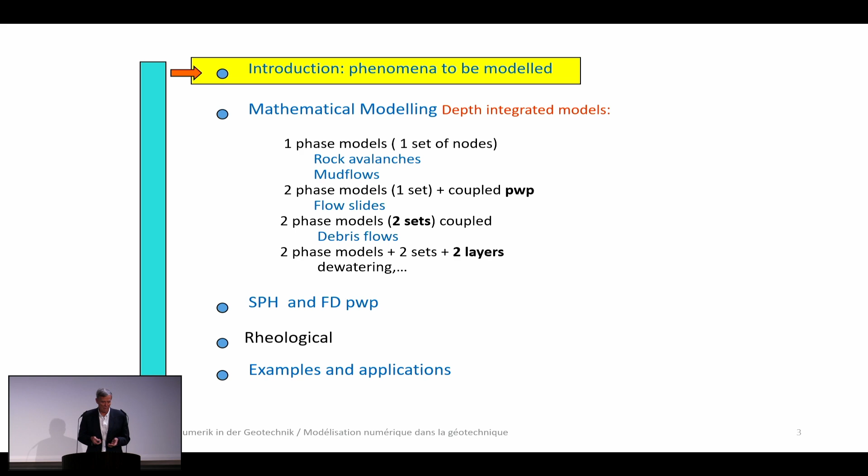Also, I'm working on a project for a bank, and people are interested in knowing, if I invest that money, will that help save money? So we are dealing with cost, risk, vulnerability, intensity of events. And also, what happens if I have to do 1,000 simulations? Sometimes it is useful to use artificial intelligence, deep learning, and whatever. So this could help. We could be talking a little bit about that.

So just to start with the phenomena we want to model, those are probably the simplest. Avalanches are just one phase. And in fact, it is the problem that people started to model at the beginning. For instance, Hutter started modeling these sorts of things using finite elements or finite differences for propagation of landslides. I have to say that what we are doing is not new. If you go back to glaciers, people were doing these things long before we were.

Then we have also mud flows. Even if it is water and soil, a mixture, people are not considering them as two-phase materials. However, in the case,

Perhaps the battery is not. Okay, seems it is dead. No, it is still alive. Okay. So the talk could take more time for sure.

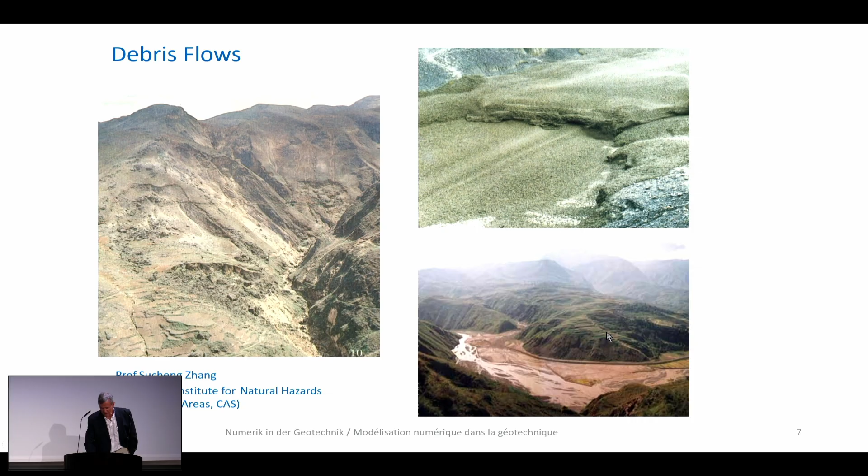So debris flow is a more demanding case, because the recipe for a debris flow is having soil, as you see here, landslides, and water. At the end, these problems finish by causing a lot of damage in regions like, for instance, South China. We have also other more watery debris flows, and in this case I remember reading in the newspapers there were floods, but a flood coming with these stones is a little bit exceptional.

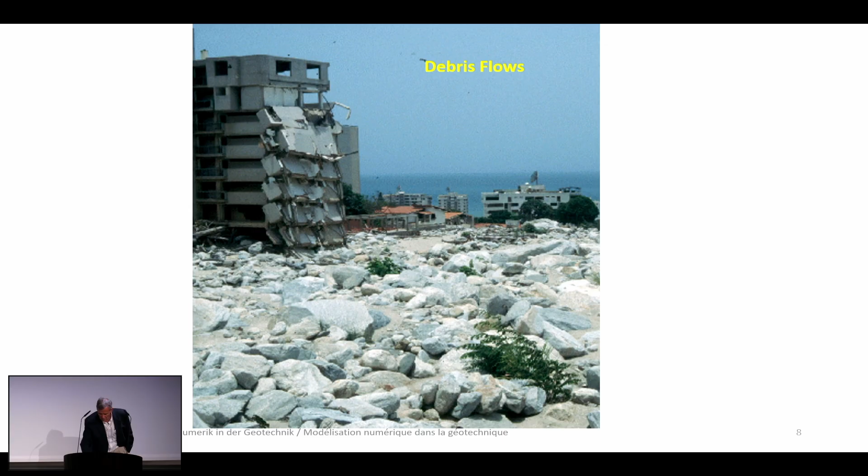Then, okay, let us see if I can use the, oh, far better, I will use the keyboard.

And then also we have the problem, which today is quite important, of landslides into lakes because of climate change, which is something we have to worry about. Permafrost is disappearing. There are blocks of ice in the Andes which are falling down into the reservoirs. And also because of us, people are, for instance, building an electric power plant in China, and then the water level is increasing, and that could trigger avalanches into the reservoir, with consequences that are very bad.

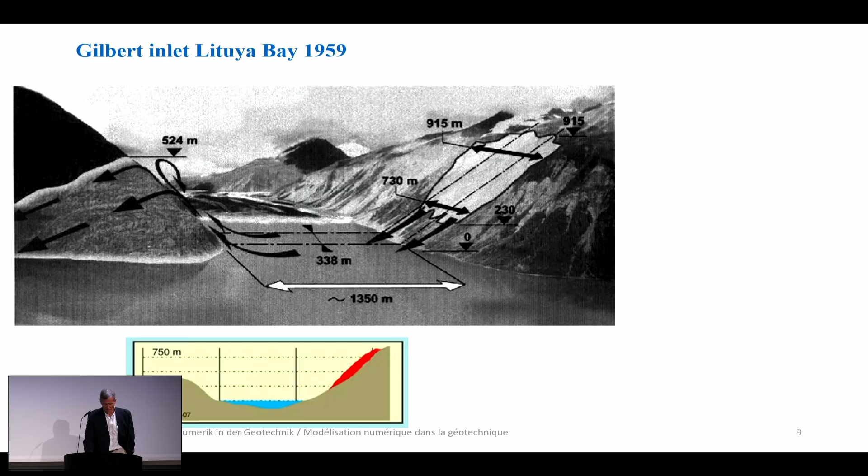So, talking about models, here you have a view, more or less, and it is true that people, as always, started with the simplest cases and moved on to more complicated ones. Even from the beginning, people were using 3D models and depth-integrated models also.

The problem with the 3D that exists today is that it takes a lot of time when propagating a very big avalanche or one with a very big runout. Techniques there are level set, which costs a lot of effort, SPH, and the material point method, which is newer. And here, the depth integrated approaches, either Eulerian or Lagrangian, have been used progressively from avalanches to flow slides to waves in reservoirs and to debris flow using two phases.

Many questions. Which is the model we have to use? Well, it depends on what you want to do. If the problem is simple, use a simple model. If not, second, depth integrated, what are they? And we will see it. Depth integrated models are cheaper, are faster, but they have to be used together with other models if you have a singular point. It is like when in a beam you have a stress concentration, you go to finite elements, to crack dynamics or whatever. And here is the same.

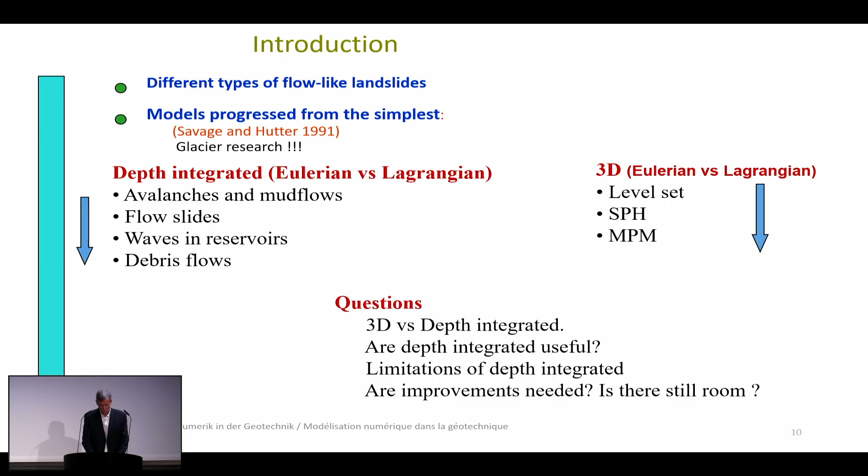Sometimes you are moving the avalanche, and at a certain moment you change from depth integrated to 3D, solve the problem in 3D and continue with the depth integrated. So combination of techniques is quite important. We will talk about this also a little bit. Well, so, this is good.

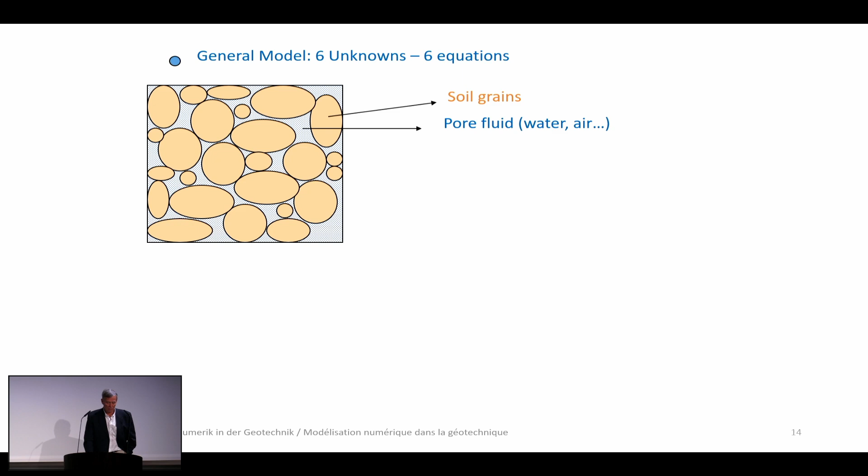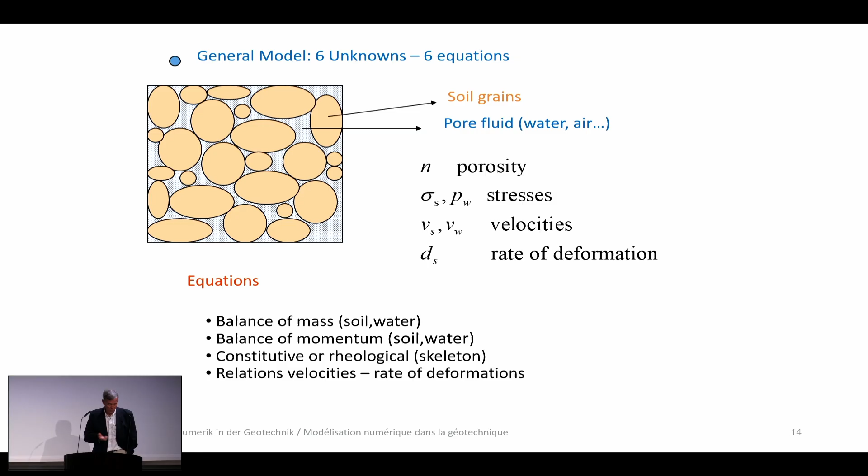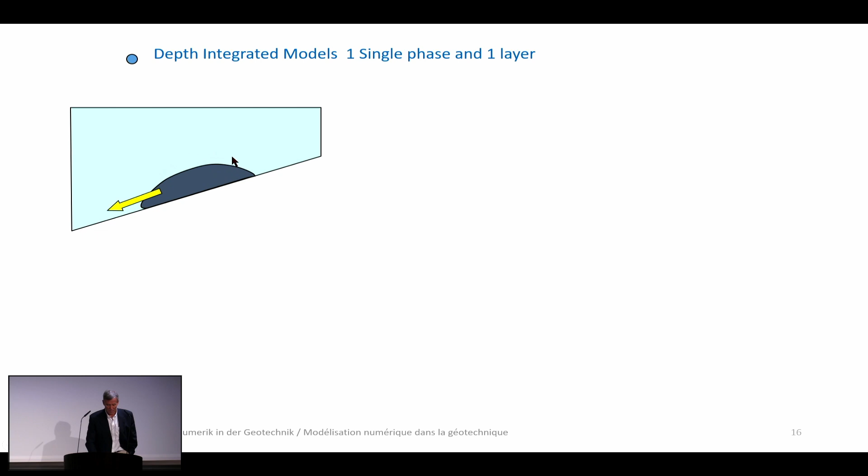Mathematical modeling, there are some questions, some concepts that are quite important. First of all, the three-dimensional model, even when the soil is saturated, which is simpler than when it is unsaturated, requires a lot of variables and a lot of equations, which is what makes them very, very expensive. The good news is that we can move using these general equations into much simpler models. What is the problem we find sometimes? Where is this free surface? Also, the boundary condition on the bottom. And these, even in the simplest cases, are the unknowns that we have.

On the other hand, if we are using depth integrated, what we are using is the height, this variable h that we have here, and the elevation. So the problem becomes a two-dimensional problem, and we don't have to care about where the free surface is, because we have it defined with this variable. Unknowns are fewer, and life is cheaper. But remember, if you have a problem which is difficult, you have to get back to the 3D problems.

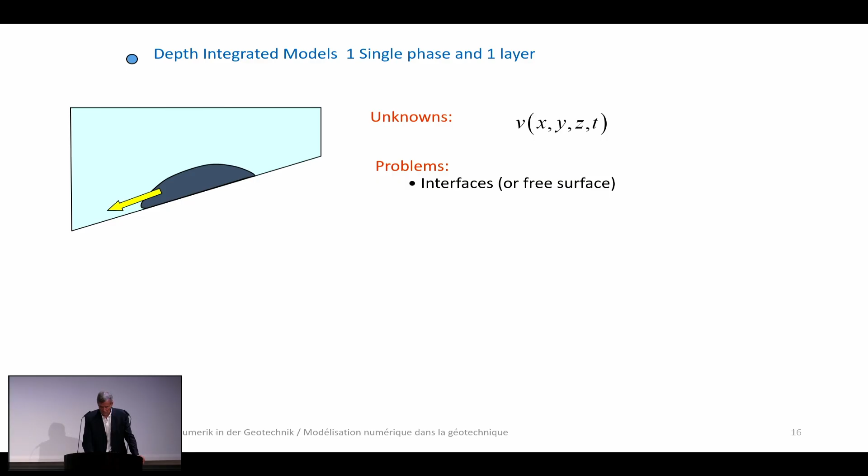Good. And what are the equations? As I'm in a department of mathematics, if I don't show an equation, I will be banned or whatever when coming back to Madrid. But anyway, life is not that difficult.

If you look here, this is an avalanche which is moving, and let us consider just one column. Force equals mass times acceleration. Which are the forces? The forces that we have here: the pressure at the sides, gravity, basal friction. And then what is the mass? The mass of this column, and the acceleration. That means that if we know these forces and the gradients, we are able to predict how this column of soil is accelerating. And this is the key of these depth integrated models.

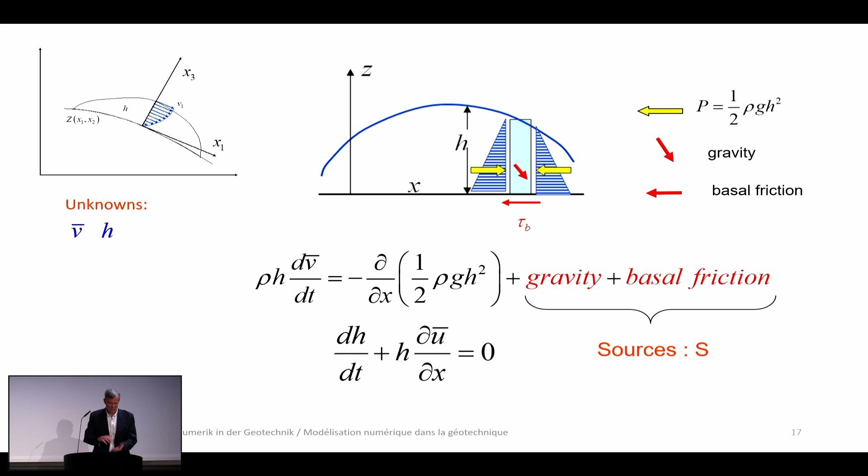Then what we write is an equation like that. So this is the gradient of the pressure. But if you look at it, even if it looks a little bit awful, what we have is mass times acceleration equals forces, period. Now the problem is how to move this equation into our nodes, into the points, because we are going to use points. And of course, we need the mass conservation, which is that what is entering causes the soil surface to move up or not.

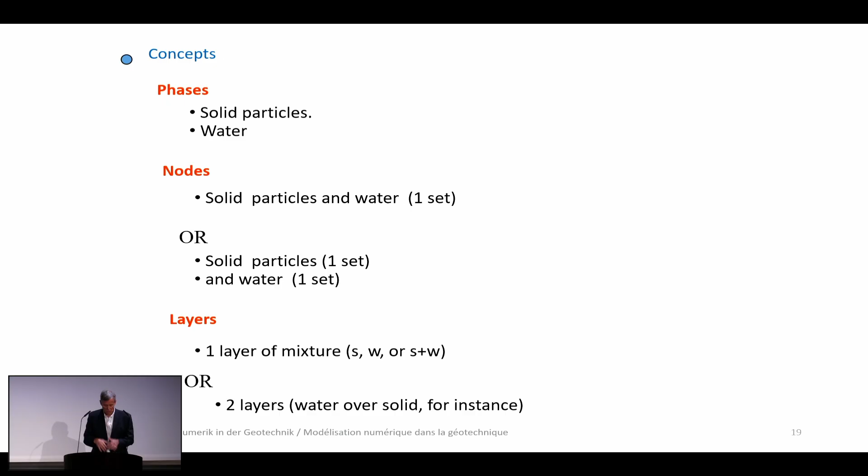Now, there is a lot of hocus pocus these days in these models, and there are some concepts which are important. Phases: the old concept that we are always using, solid and water. Then nodes. We can use one set of nodes for the mixture, or one set of nodes for the solid and another for the water, and we have to do that when the water is moving relative to the soil, which is important. Layers. If everything is homogeneous, we consider just one layer. But in some cases, we will need to use two. So I'm going to pass very fast over these concepts and illustrate how we use them in modeling.

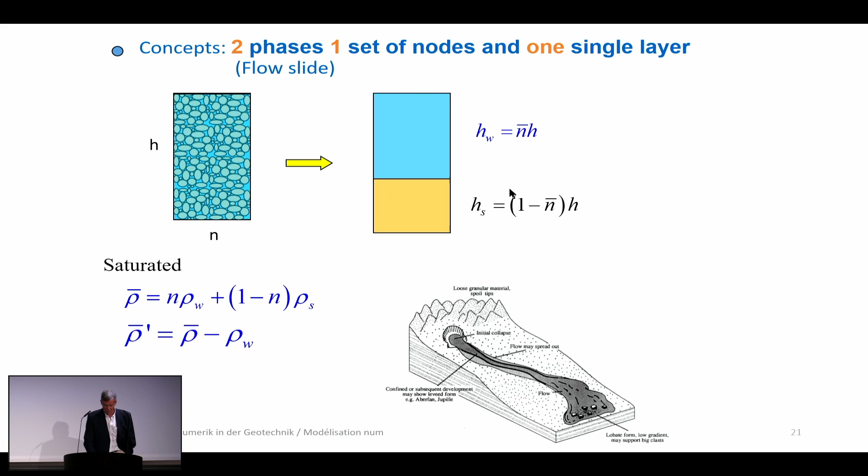So avalanches and mud flows, one phase. We don't have to worry. Either we have unsaturated dry, where air is a fluid but is not considered so far, or mud flows. Okay, one phase. Next could be having two phases, water and soil, interacting through water pressures, but one set of nodes. It is like what, for instance, finite element codes do, considering nodes with variables for water pressure and displacement, so u-p formulations. This is a nice approach. Then the pore water pressure that we have to use.

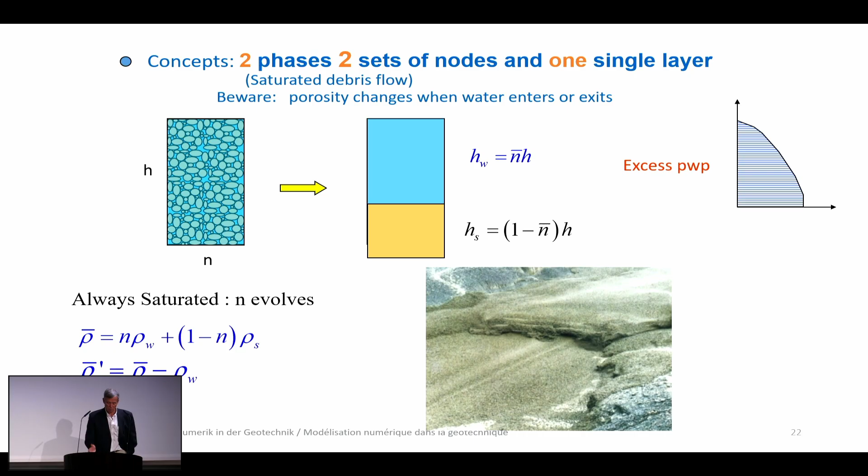In the case of the debris flow, the situation changes because we have two phases, and now we will need two sets of nodes. Again, if everything is homogeneous, it is just one single layer. Again, we may use, if we need it, pore water pressure analysis. And in the case of waves generated by a landslide, what is important is that we have a column here, but in this column we have just soil and water. The air is something that we are not considering so far. Okay.

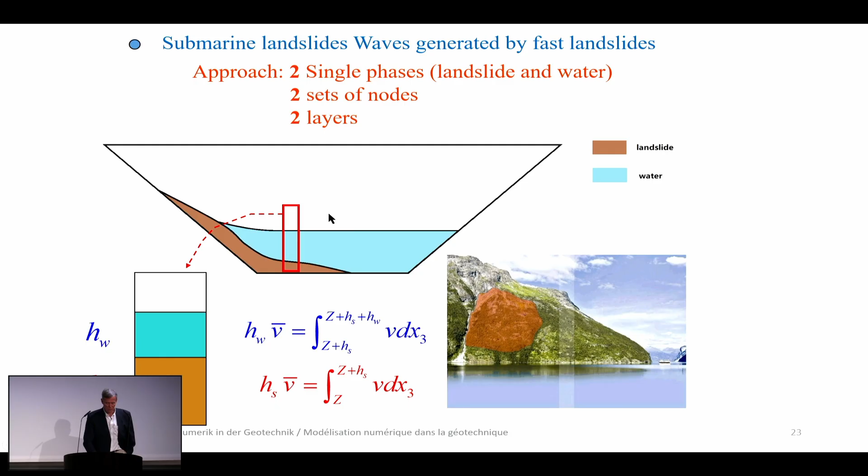But this is the simplest approach. This is what we are doing now. But there are problems. So I will just talk about this one, the dewatering. So imagine that you have a debris flow, and the water is abandoning the debris flow. So what will happen is that the water level will be moving down.

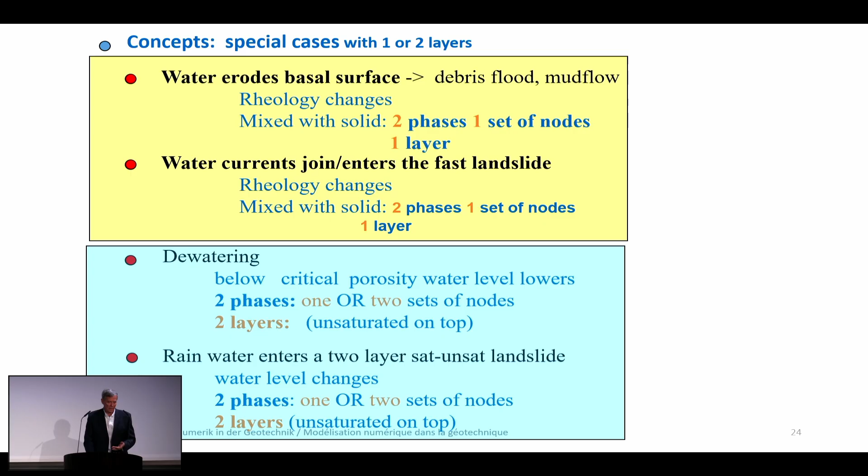So we will have something which is not homogeneous. So we will have a two-layer system. And it is important. In other cases, we are adding water to the mix and whatever. So this is just to show you the three cases where we have this problem of the dewatering. The first case is that the solid fraction can stop before the water does, and then the water is abandoning the fluid, the mass.

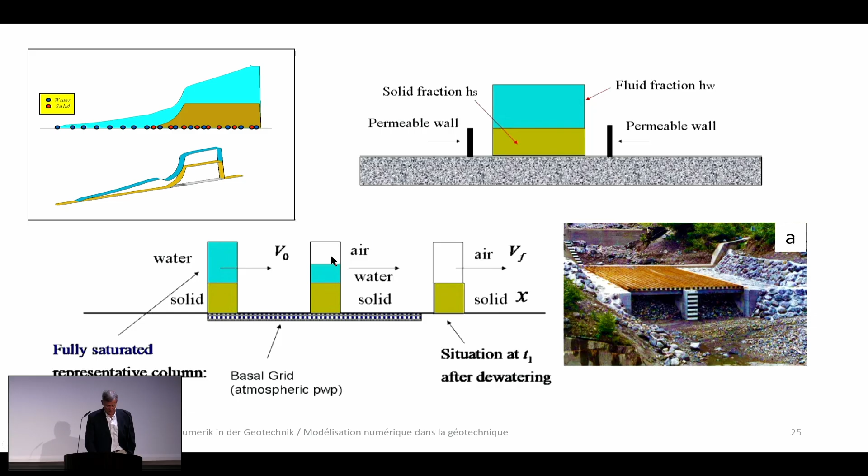The second is something that for engineers is important, because we can use permeable walls. This sort of, not to do propaganda, grids that are just retaining big particles but letting the water pass through. And also the basal grids which are letting the water abandon the soil. So these things are causing the water level to get down. And then we finish by having a desaturated part, a dry part in the column.

The equations, well, here what we have to do is to consider that we have two layers, and then just for the sake of representation, we will use white color for the air fraction, blue for the water fraction, and brown for the solid. It doesn't mean that one is on top and the others continue going down.

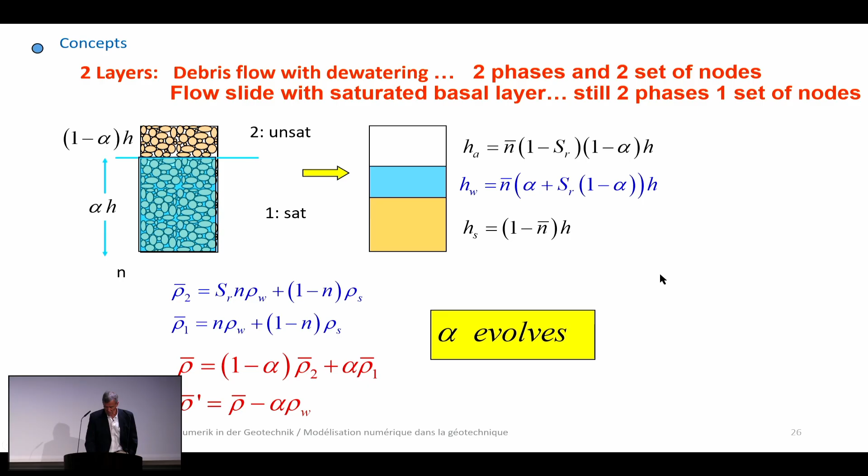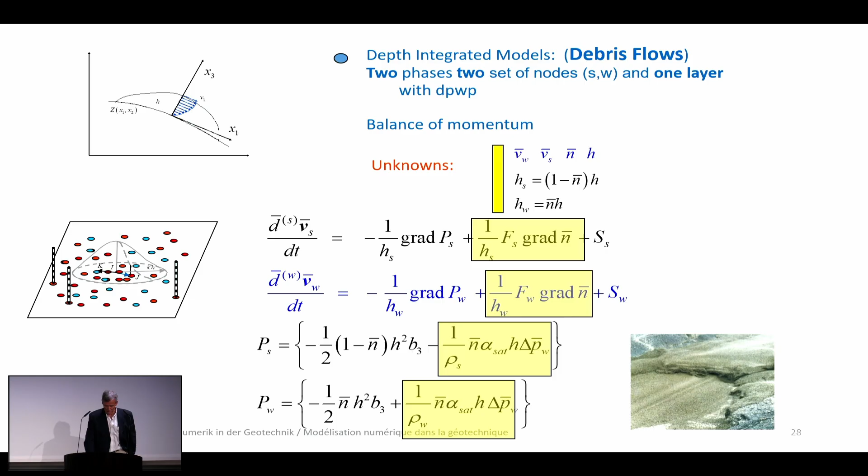These are the equations in their full glory. Never mind, all of them are acceleration and forces divided by mass here. So for solid and water, you can put them in the way you wish. The good thing of these Lagrangian approaches is that they are much more easily understood. And here I have included a little picture about the nodes that are used in this more general case. We have red for the soil, blue for the water, and then we have also these columns, which means that we can model pore water pressure dissipation using an extra finite difference mesh and all these things.

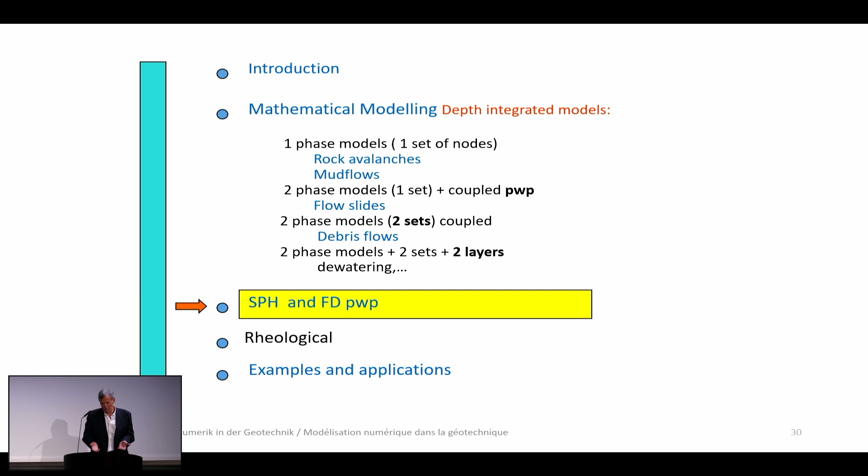Now, force equals mass times acceleration. But forces include gradients. If we would only have direct forces like gravity, everything would be very easy. But we need interaction. And to do this interaction, we have to obtain the gradients, like in finite elements. We obtain the B matrix and all these things. Here it is a little bit more complicated.

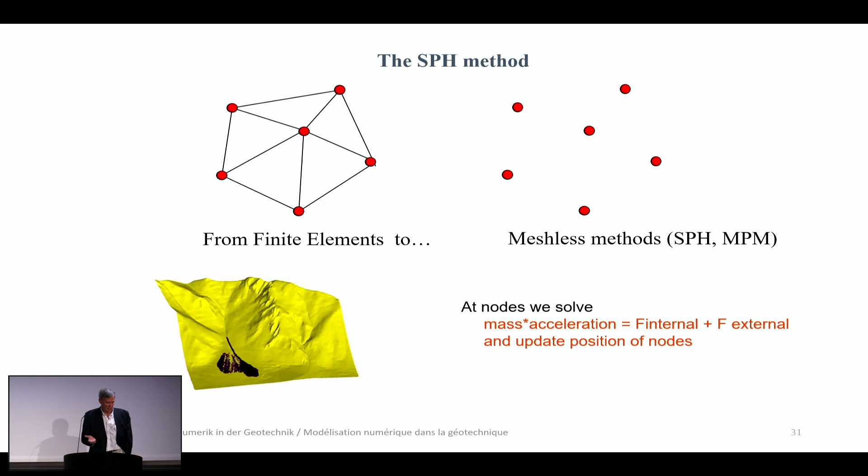And this is the moment at which people get a little bit confused. So just to begin, SPH is a meshless method. Think of a finite element mesh without the elements. The nodes remain. Advantages: you can have the nodes moving around. For instance, this is one of the first cases that we studied in Italy, in Campania.

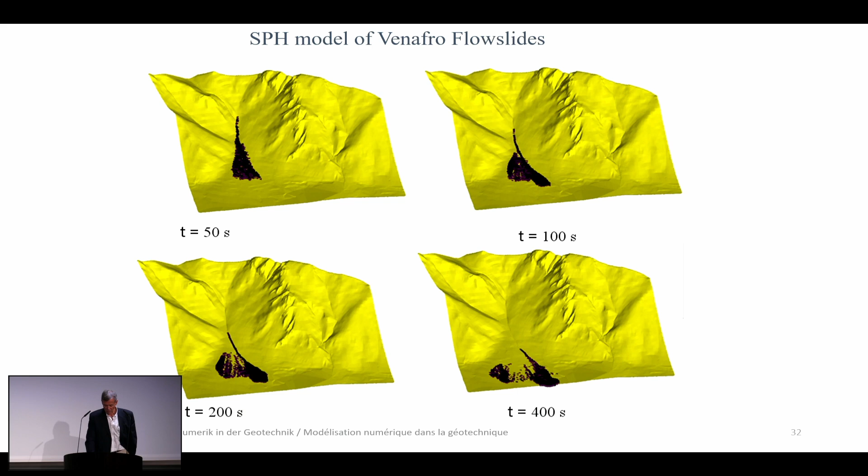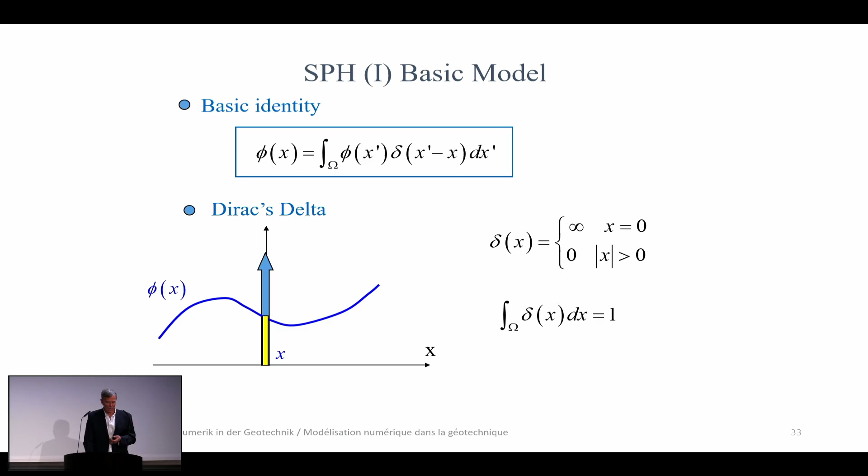So instead of using the delta, we use this sort of umbrella, very useful today, this sort of umbrella functions, which take into account, for this point, only the points which are under the umbrella. So under certain conditions, this approximation is correct when this function approximates the Dirac delta. So still, this is an integral approximation. Wow, this is very difficult. And then, okay, I will stick to finite elements.

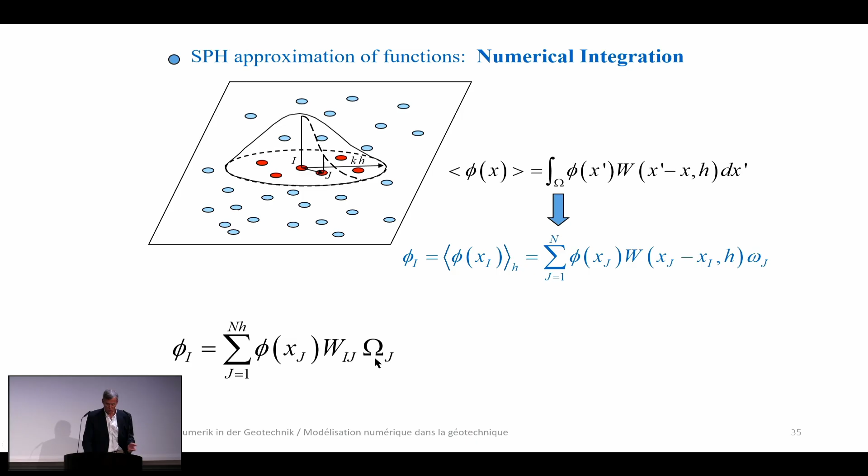Good. Now, if you look at this thing, the problem is that we are interested in what is happening in the nodes. What to do? Okay, what we do in finite elements: we do a numerical integration. So this integral, we say it is a summation of the values at all the points multiplied by the weight, the associated area. So again, from here, things could be much simpler. And then the function is given by an expression like that, where this is the associated volume, and here we are. Still, why do we need to define a function if we know the function?

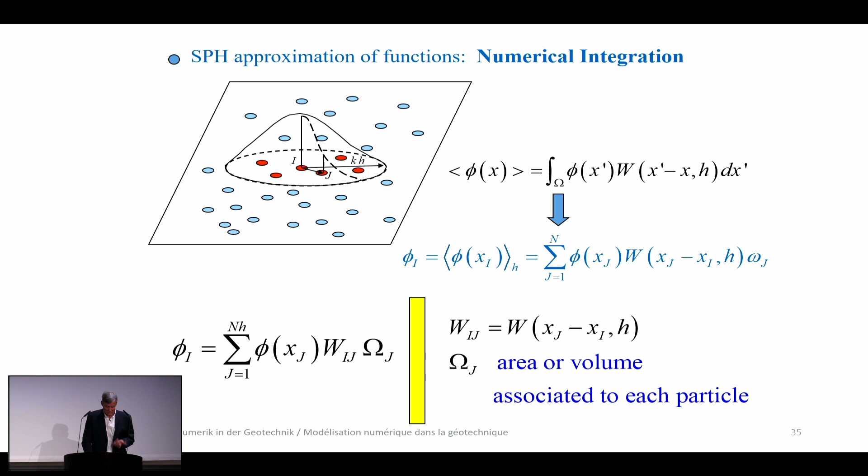Answer, because what we really need is to approximate the derivatives. So this is for the case of SPH. For all of you who are familiar with SPH, in SPH, mass is introduced as density times the volume, and then you play with densities, with masses, or whatever.

Here, we are talking about volumes, so we are not talking about a mass, we are talking about this volume. This is the associated surface for this particular point, and this is the height. So the interesting thing is that the mass is a volume, and the density is precisely this height. If you have, for instance, an SPH code for compressible flow, then it is very, very easy to change it into a depth integrated flow, which is what I did. You just change densities by heights, and everything runs smoothly.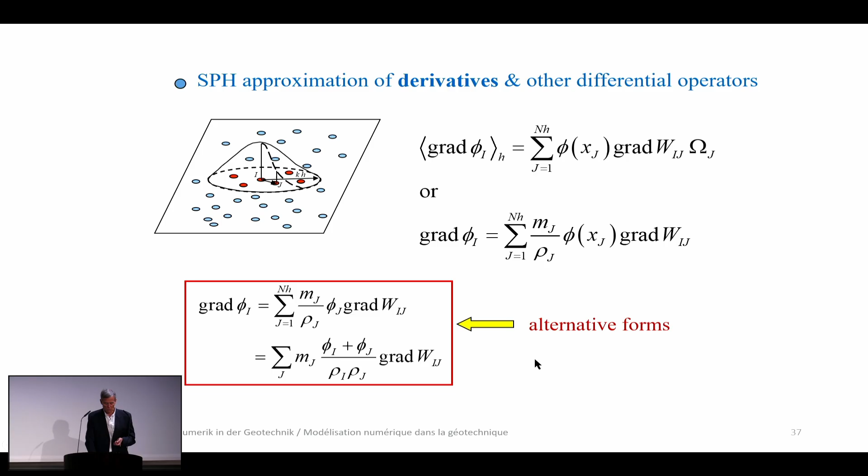Okay, let us continue. The equations, I'm taking out the sources, the forces of gravity and friction. This is the equation that we have for solving the problem due to the pressure. So acceleration at one point is given by this summation. So it is not difficult. Well, I am lying a little bit because you need to know which are your neighbors, okay?

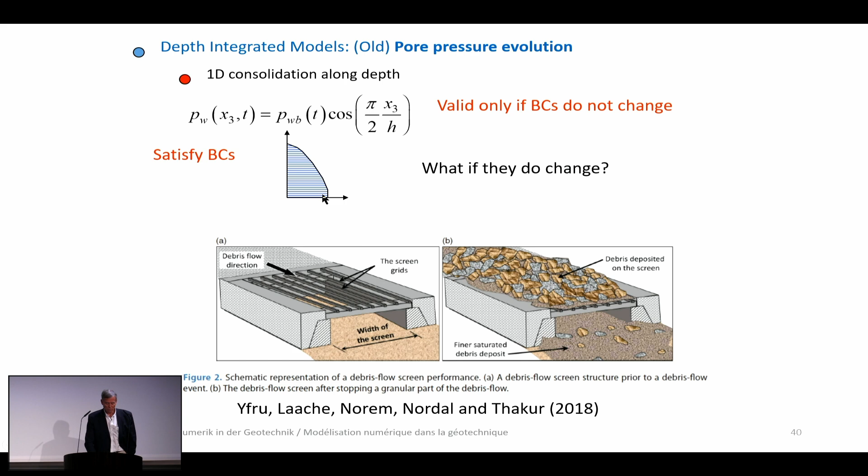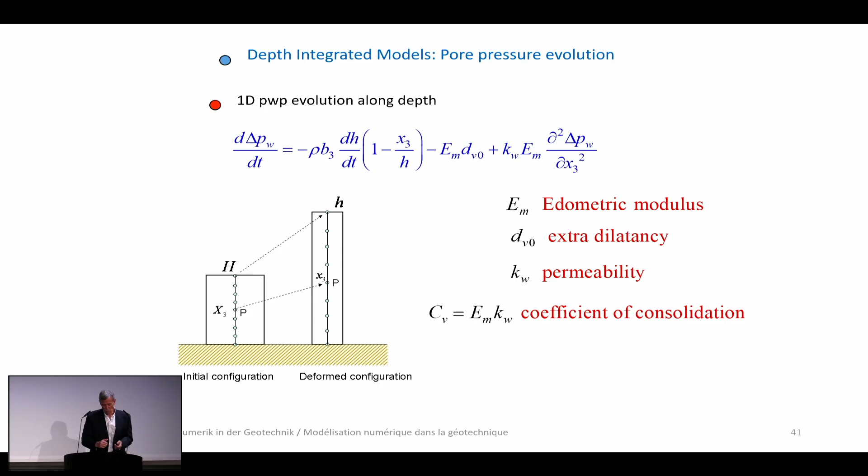What to do? Well, what we can do is to use this sort of finite difference meshes; this is a pure Lagrangian formulation, so it is immediate. So we solve it with finite differences. So you see, SPH, but SPH plus finite differences. And then we can solve this equation, and we can add whatever we have. For instance, we can add extra dilatancy if, like some people say, when a material is shearing, it tries to dilate. So this is the idea.

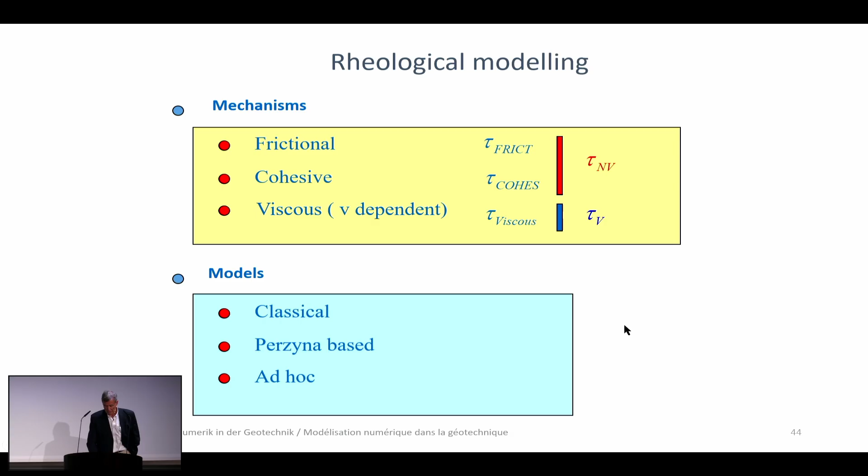Then rheology. The rheology is also very simple. Mechanism of friction: the mechanism of basal friction is friction, of course. Cohesion, and then we also have some viscous effects. Models: most people use classical or ad hoc models, like for instance Voellmy, but they could also be based on Perzyna. However, I will tell you about a problem.

In all the formulations we have, the basal friction is obtained by using the gradient of the velocity. But in depth integrated problems, we have lost this profile of velocities. We only have this average velocity. So what we have to do is, knowing h and knowing the average velocity, obtain the basal friction.

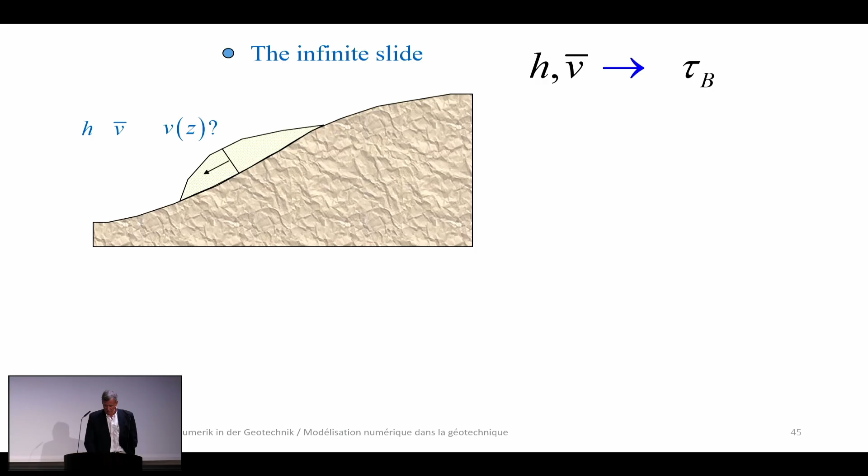How to do it? Again, using a little lie. The little lie is just to say, okay, at this point, I have a steady state problem in which the velocity is constant, no acceleration, and it is an infinite slope, an infinite landslide, or whatever. And then, yes, for this case, it is possible, given the velocity and the height, to obtain this friction.

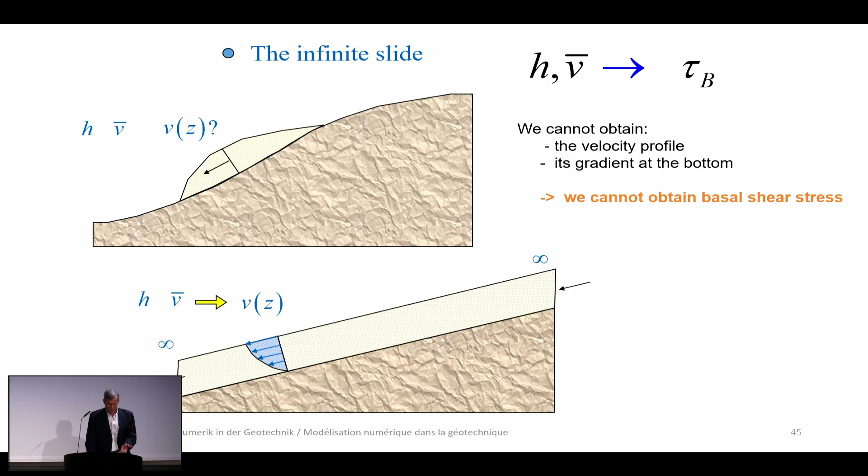But remember, this is not truth. Just think, if this slope is horizontal, just imagine that we will be having a velocity and a height that corresponds to other slope angles. So we are approximating things in a crude manner, but we are happy with the approximation, which perhaps we are not right about.

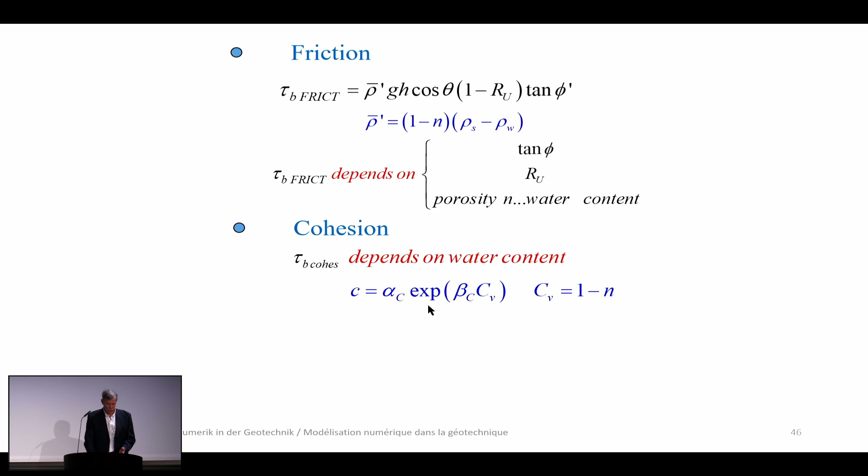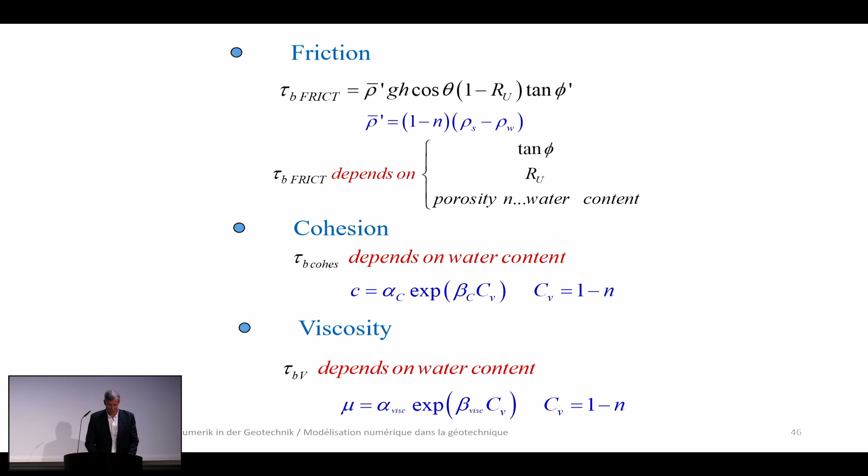Friction. Now, my point is that most of these properties depend on water content. So if we have a landslide with a certain water content, properties will change. In the case of friction, it is through porosity. In the case of cohesion, there are formulas, Julien for instance, telling you how this cohesion depends on the water content, and the same with viscosity. Viscosity depends on water content.

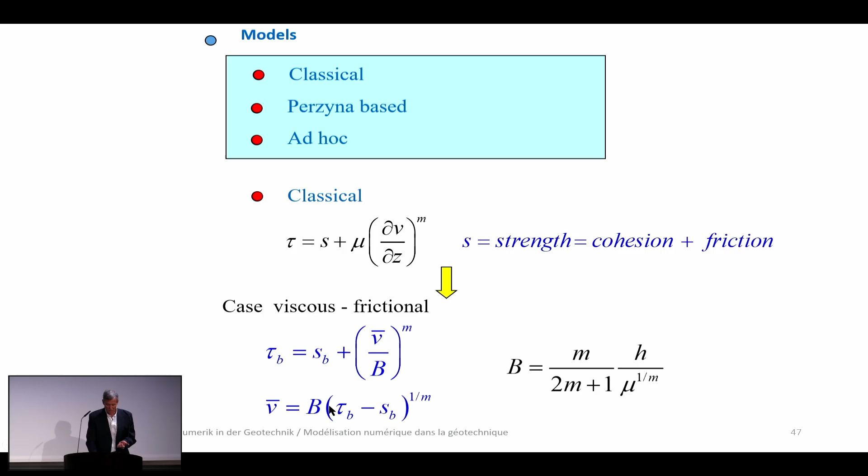Regarding the models, the classical models, just 1D models, tell you that the shear stress is given by the strength plus viscosity in general. Then you play with them and, using this very simple infinite landslide model, you can obtain laws like the ones you see here. One thing that is interesting, you probably don't need to know it, but if you know all the forces, you can obtain the velocity. Good.

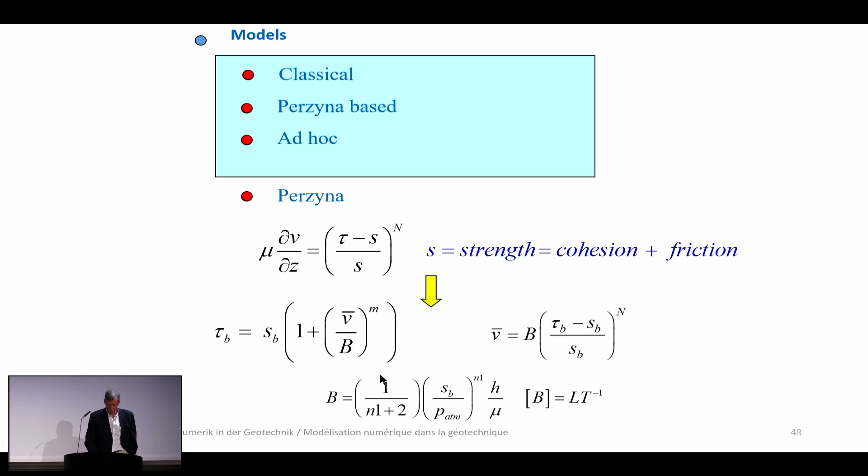Perzyna models. Perzyna models in 1D are more or less expressed in this way. So we could say that in the case of Perzyna, when the stress is higher than the strength, this is the formula we use for it. Again, the formal way of writing it is just the same.

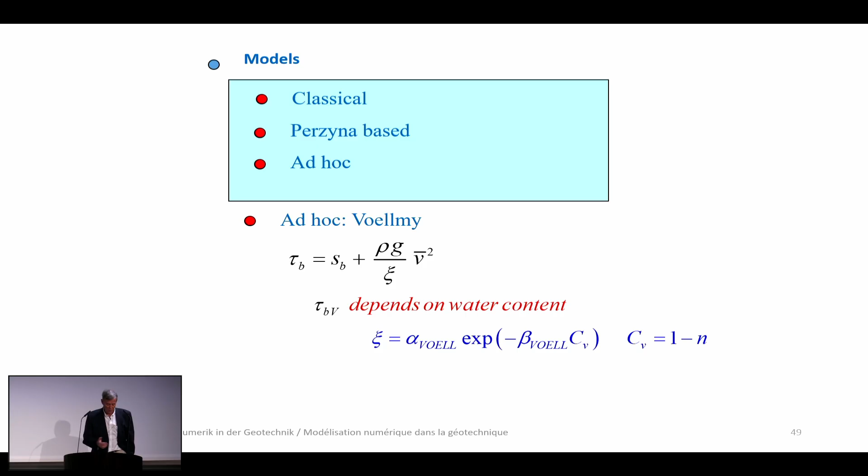Ad hoc, people are using for avalanches and for debris flow this sort of Voellmy law, in which you add a viscosity which depends on the square of velocity, and use a Voellmy coefficient that we have here. But another thing which is important is that the Voellmy coefficient may be assumed to depend also on porosity, so the water content. So this is interesting.

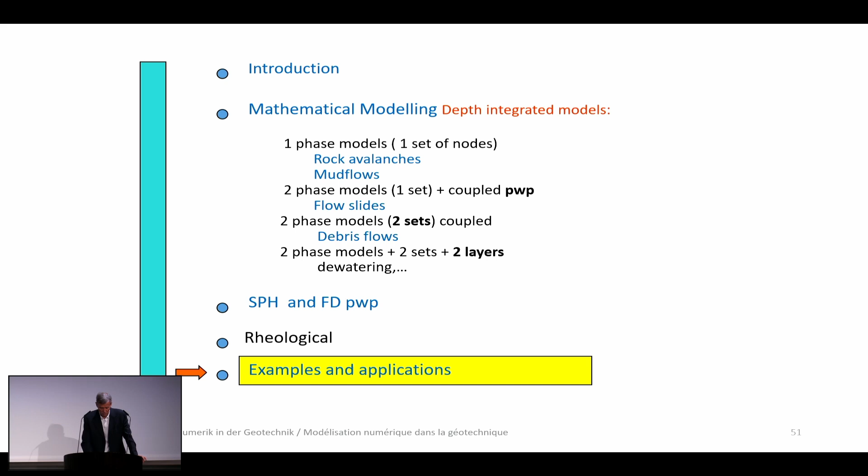And then we arrive to the examples. The examples and applications we are going to see are mainly to reinforce the points we have been talking about. First of all, this is a debris flow in Hong Kong. It is a small debris flow, but they have very nice measurements, so it was possible to reproduce it. And the question is whether using a debris flow with two phases will also require pore water pressure or not.

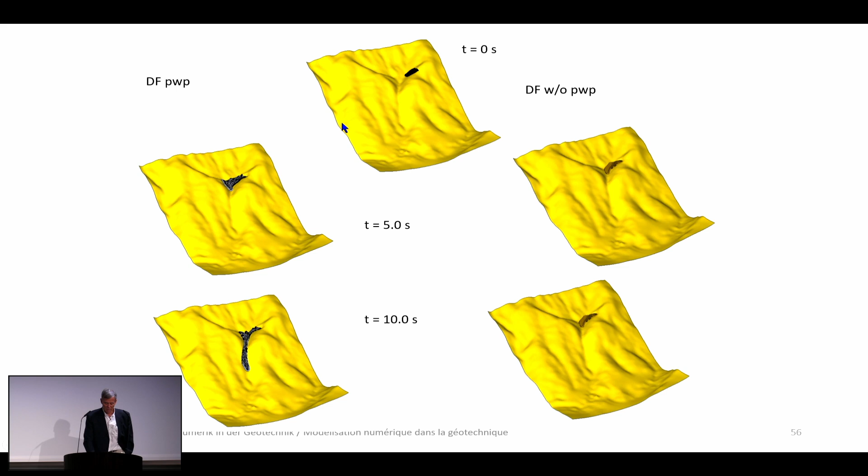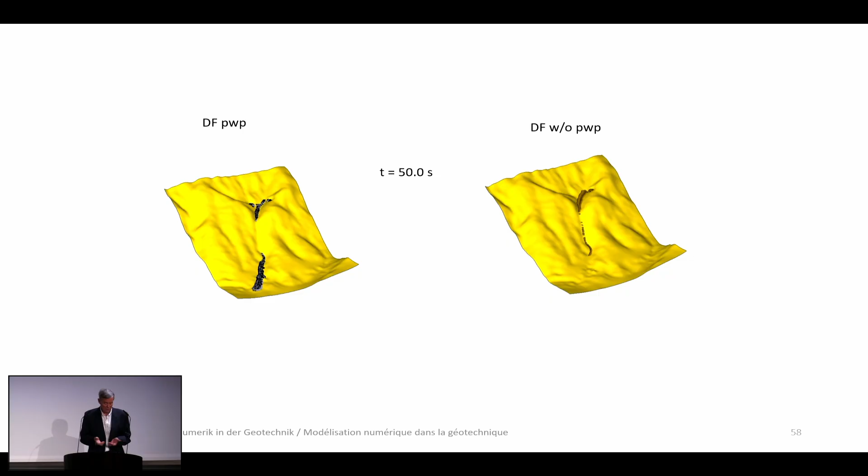Left is with pore water pressure, right is without it. We have our landslide, and this is the evolution along time. You see that with pore water pressure it is evolving faster, the runout is larger. If you are not using pore water pressure, the price you have to pay is to say that the friction angle is smaller. So this is why people use very small friction angles for granular materials, and it is probably because you have water and pore water pressure.

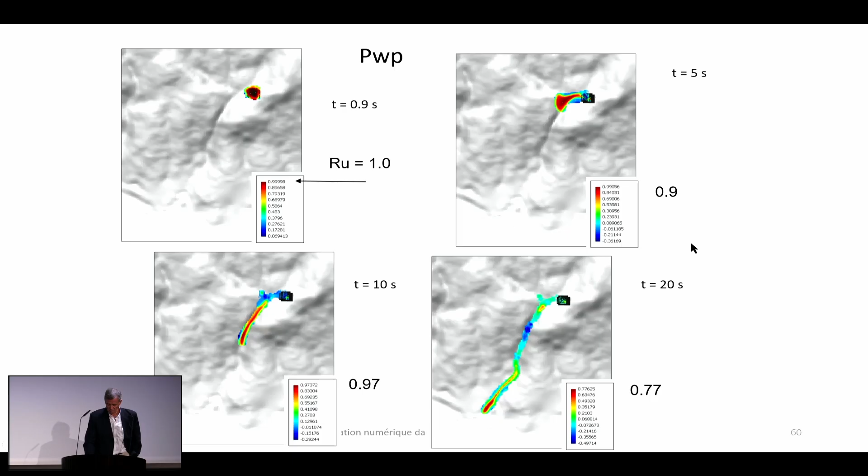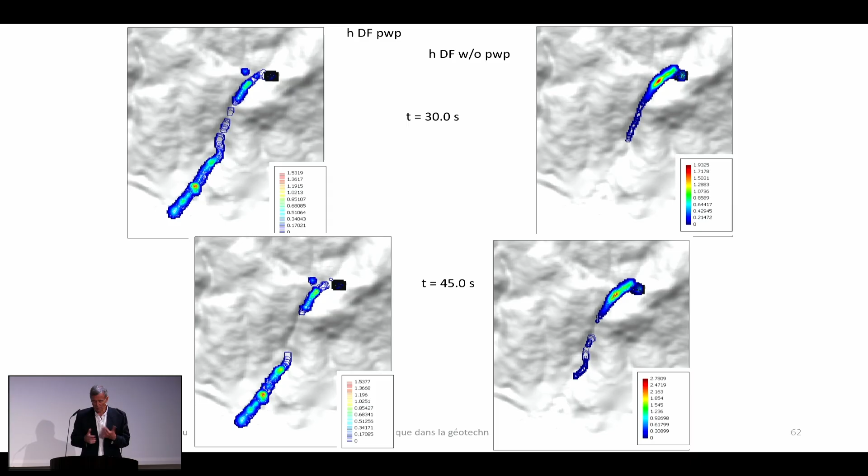This is the propagation of the front, in space and time, and you see that they are much different. At the end, in the case with pore water pressure, there are still some points in which it is dissipating. These models are important to use when the time of consolidation is of the same order as the time of propagation. So this is a sort of recipe for it.

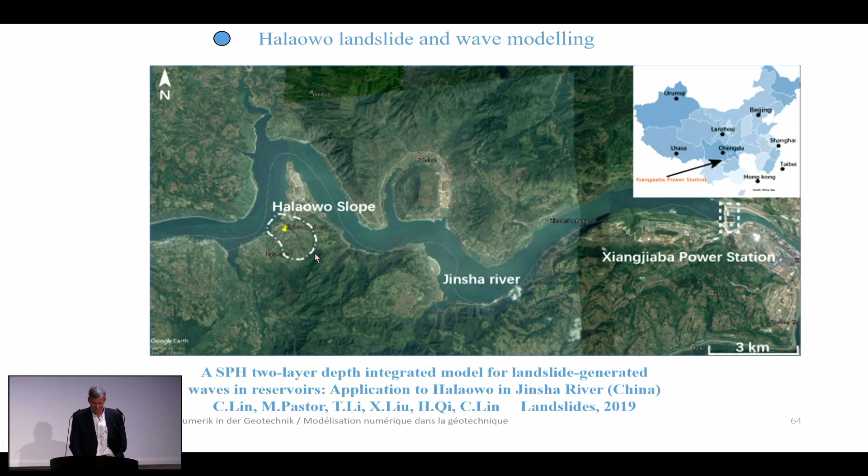Second, we were talking about two phases, two sets of nodes, and a single layer. Let us go now for the case of two layers: waves coming into a reservoir. This is South China. This is a slope, and here there is a power station. The approach is that in the near field, it is better to use SPH to get this thing entering, but for propagating long distances it is nice to use another sort of code, for instance finite elements, finite volumes or finite differences.

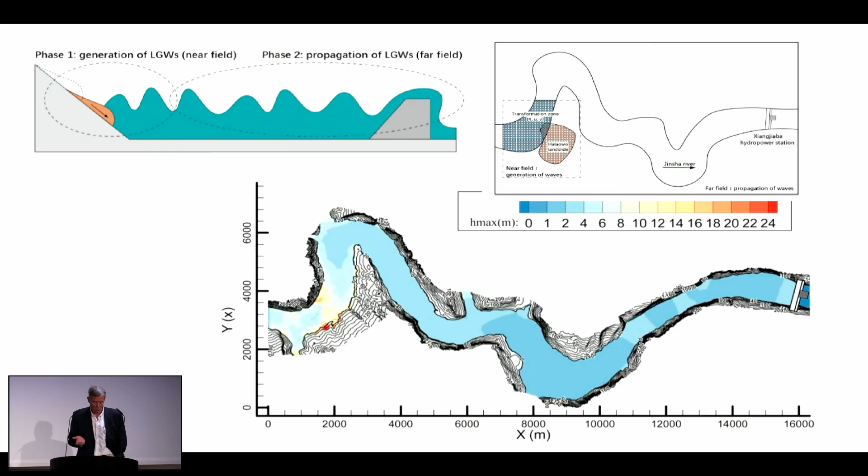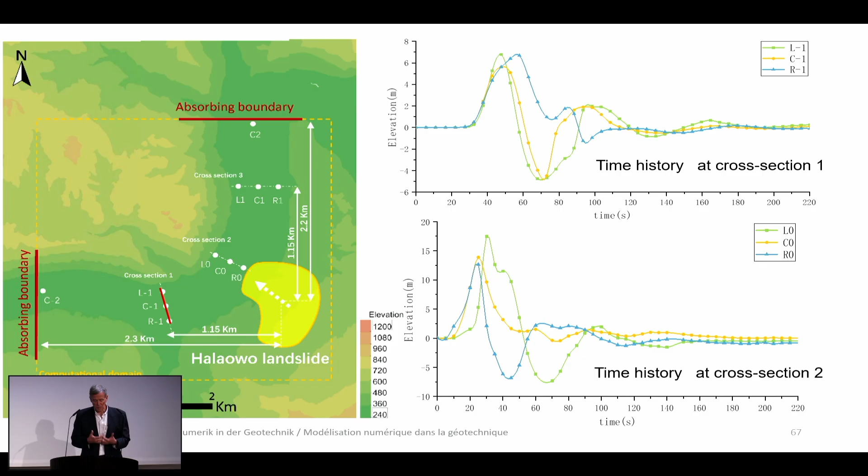In our case, we were using a code called FUNWAVE to model this. The near field and the elevations in the near field, SPH is quite okay for that. However, if you want to propagate it along very long distances, the problem of SPH is that it is very expensive, so it is far better to use the other approach.

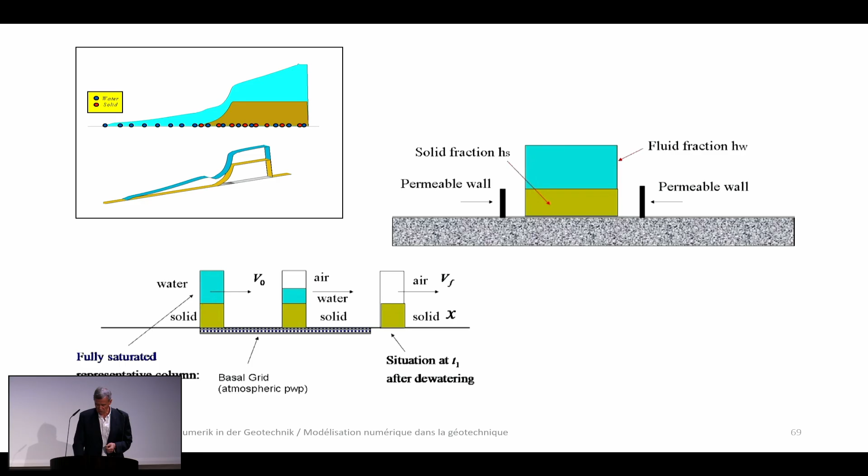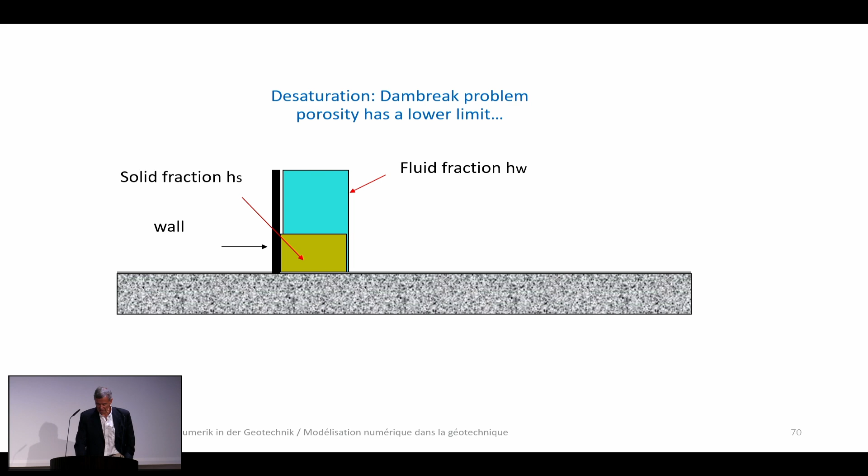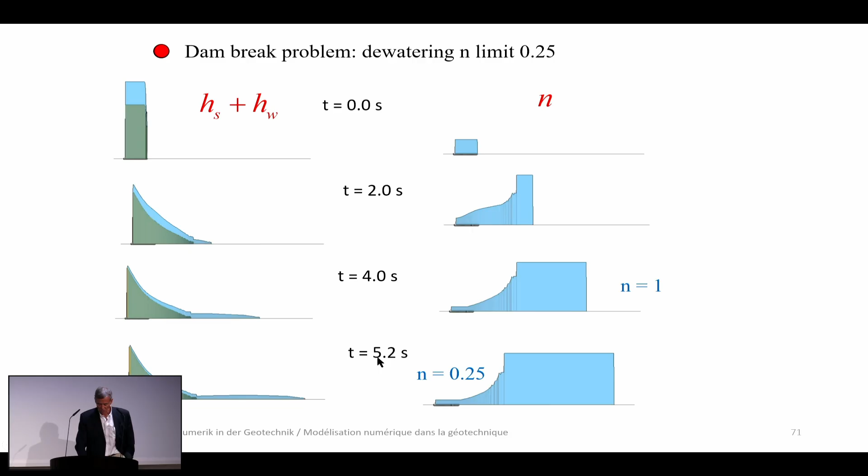Now, coming back to the problems with the water I was mentioning. Imagine that we have a problem in which the solid fraction has a high friction angle. The material will stop and then the water will continue flowing. If you see here, the water has abandoned the domain. And here we have the porosity. Porosity is restricted, but when the water abandons the solid domain, porosity obviously is 1. These are two films, but we saw that they were not working.

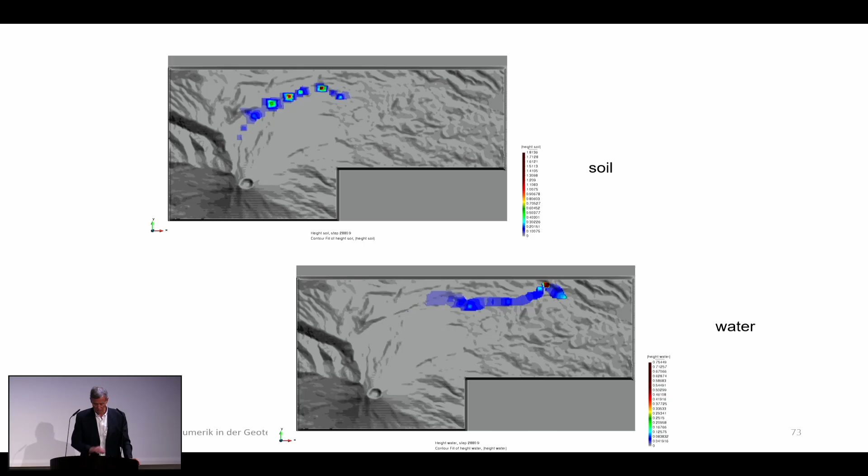And this is another case, the Popocatépetl volcano. The upper part is the solid fraction and the lower part is the fluid. So the fluid is abandoning. This doesn't mean that it has been observed here; it has been observed in other lahars, but we have the topography of this Popocatépetl gully, and we study its propagation doing this.

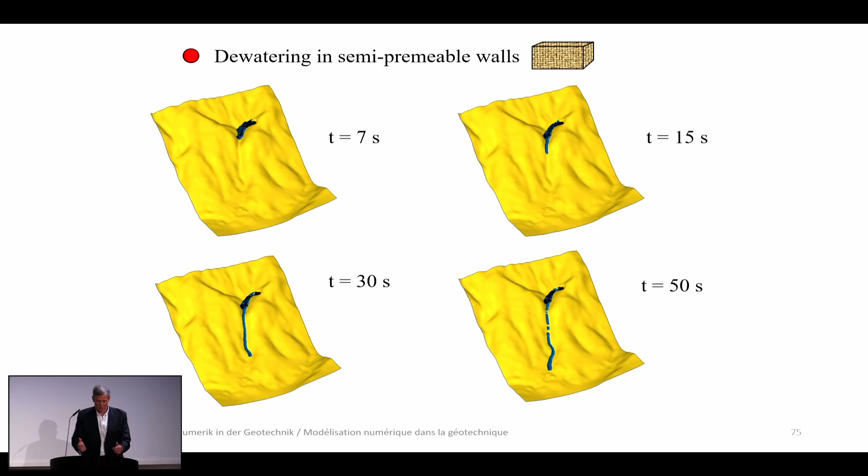Permeable walls. An avalanche arriving here meets a permeable wall. What happens is that the solid stops, but the water continues flowing. So what happens in the soil is that the mass is dewatered, and the water continues further, which causes less damage.

This is another film of the same thing we've been looking at. This isn't just for fun, we were working on solving a problem of a very big landslide in Tegucigalpa, which was a slow landslide. So can we model slow landslides?

Yes, but it is very expensive. Imagine you have a landslide with a time period of 1 year, 2 years. And here, the time step is of the order of seconds or less. So we have to get rid of that.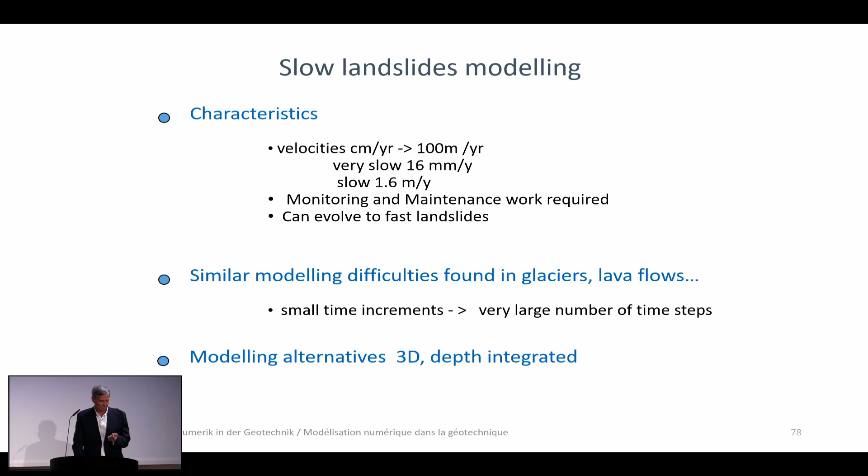So again, what is the solution? The solution is not original. It was obtained first by people working on glaciers, and then at École Polytechnique Fédérale de Lausanne, by Laurent Vulliet, Hutter, and others. What they do is assume acceleration is zero, and then obtain the velocity at time n+1 using an expression that takes into account the viscosity law you are using.

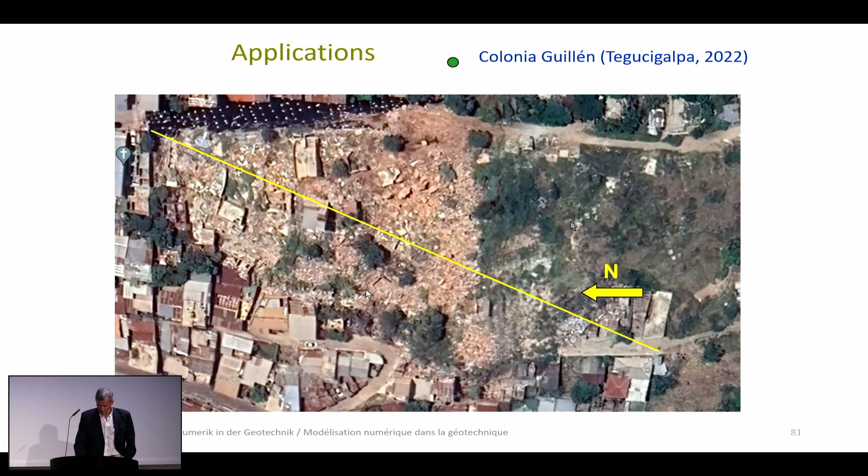This is the vertical cut of this. Here you can see the landslide. The velocity of progression was something like 10 meters in 1 year. So we have only 2 sections.

It is a pity, a shame really, because we don't have measurements of pore water pressure. Remember, this is a very marginal quarter of Tegucigalpa, so not many things were available. And then we see how the landslide is propagating over 3 months.

Propagation, so. Now let us go to one of the last examples, last cases. Imagine that I am interested in knowing the vulnerability under a scenario in which I have uncertainty in the parameters I'm using. So we use Monte Carlo for this avalanche, and here we have the pixels.

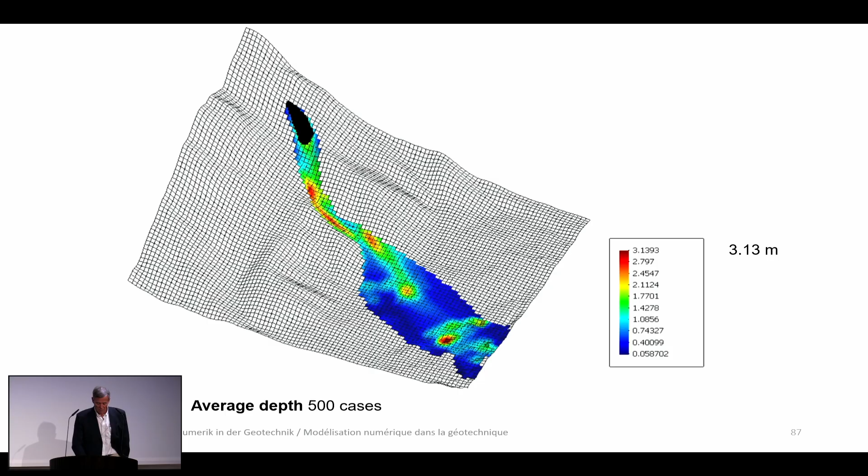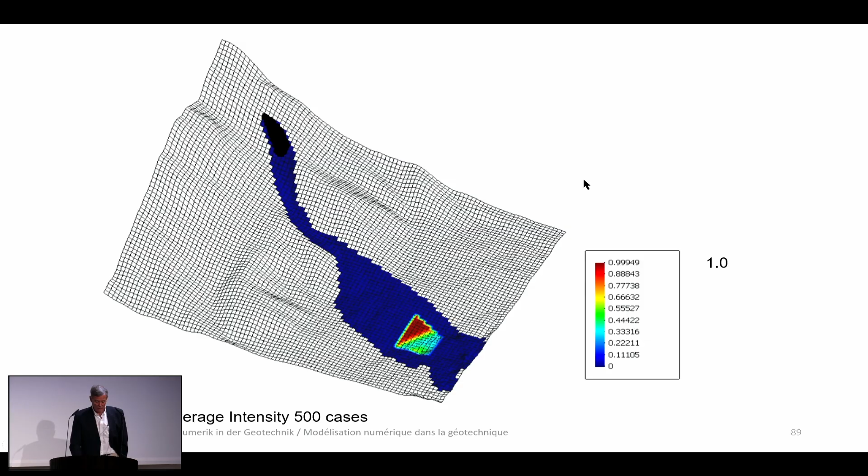This is the topographical grid we're using with SPH, and then we can obtain the averages for this set of 500 cases - average depths in the pixels. We could also obtain the maximum values, the average intensity in the exposed asset we are interested in. And knowing the average intensity, we can obtain the average vulnerability.

What is more important is that we can give not only the average, but also the standard deviation. Knowing this, we have the statistics. So if we are asked what is the probability that the vulnerability exceeds this value in this asset, you can assume a probability distribution, for instance a log normal, to answer this question.

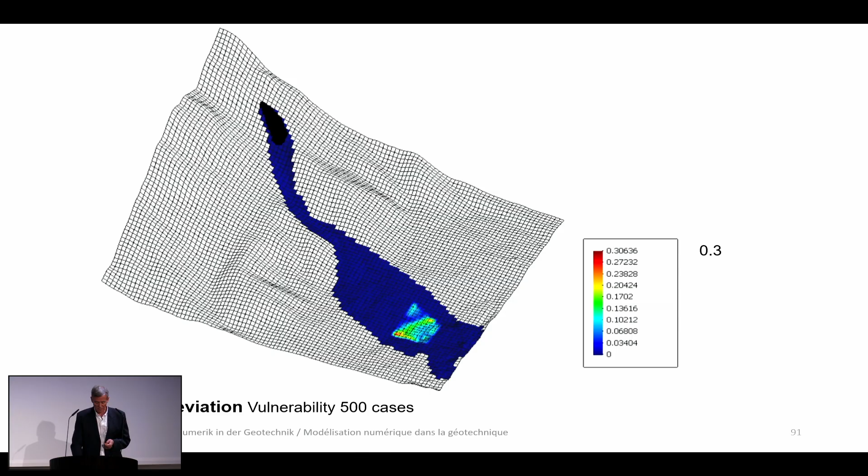Another thing we are working on - when somebody says 'we are working on it,' it means you have more doubts than certainties. This comes from a volcano in San Salvador called El Picacho, from where there are some debris flows coming.

It is true that at the beginning it is a solid material, but perhaps it is the pore water pressure at the beginning which is triggering the landslide because of the rain. But the rain is quite intense, so you have to assume that there is also water circulating around that.

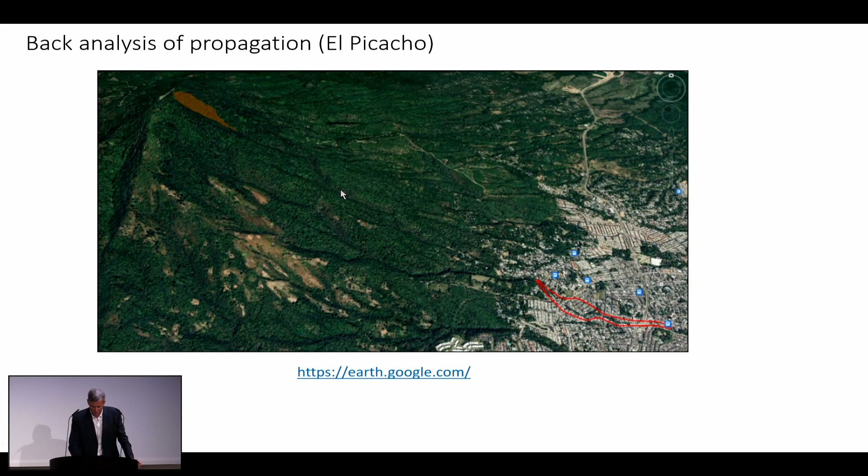What's interesting is that from here, this is the area where it is deposited. If you look at the papers and studies done in El Salvador, you find friction angles of 0.1, 0.05, which are very, very low, not to say difficult to believe. And also you are adding a Voellmy coefficient. That's okay, that's fine.

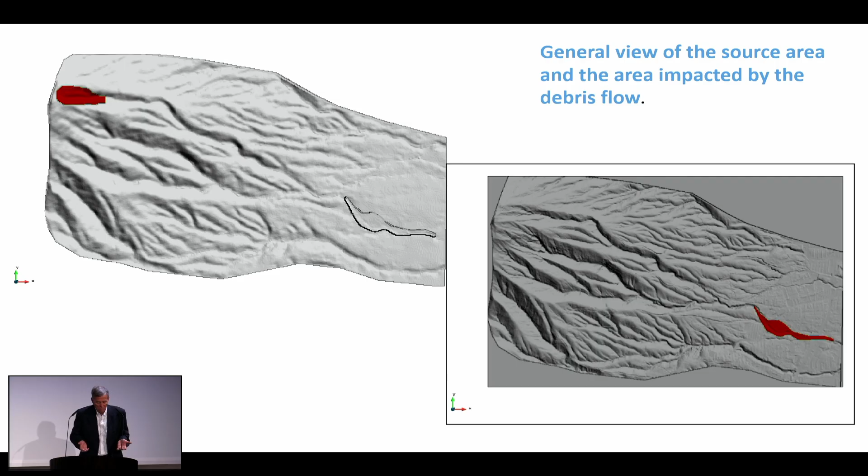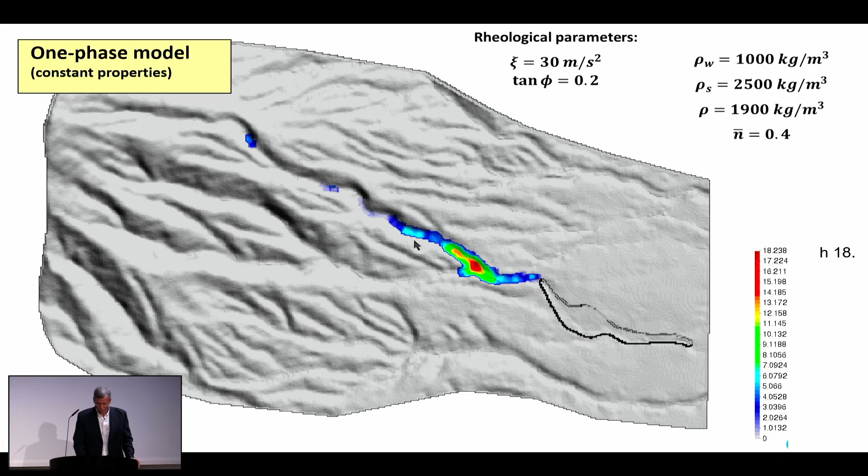But what if what happens is that properties are changing with the addition of water that is being channelized around this quebrada, this gully? Using the one-phase model, it stops here. But using the one-phase model plus inflow, plus taking into account this change of properties with porosity, we obtain a better solution. I'm not saying this is the real thing, what I'm showing are the differences between including water or not.

Why are we doing this? Because somebody showed us newspaper pictures of this debris flow, and at the end what arrived at the village, at the small town, was very watery. So at the beginning it was very solid, and at the end it was very watery. So water had come, and the properties obviously should have changed.

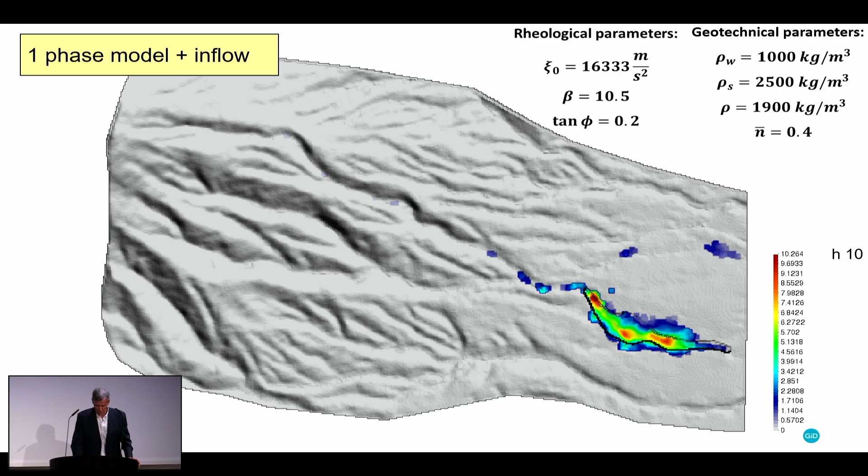And then you can obtain vulnerability - vulnerability you can obtain just for one case. So this explains a little bit why in this part of the city the buildings were destroyed.

The main problem is that if you want to assess vulnerability, you have to determine the degree of damage done to the houses. If you want to do that while sitting in academia with your computer in your office, you don't have the slightest idea what happened. Nothing better than going there and talking to old people like me, having a beer with them and asking what they saw there.

This is a fantastic mechanism of information. So this is another thing - yes, we are doing models, but we have to talk to people. We have to go to these places.

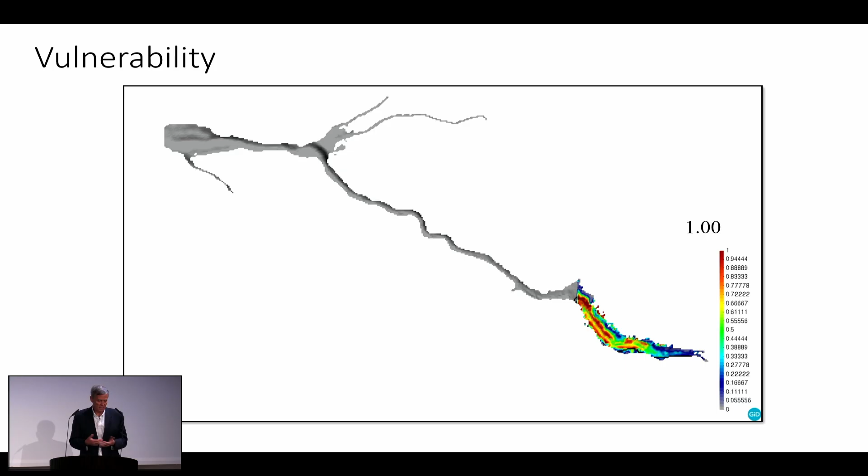I remember in China with a professor, we were walking in the mountains just to see the probability of landslides triggered by earthquakes, because they were building dams. He was sitting in little houses with old people, asking them, 'Laoba, boss, could you give us your advice?' And this works beautifully. So this is quite important.

Finishing up - this is another example of how we could use artificial intelligence. We were thinking about that for the Popocatépetl. We were taking systems, something like 15 to 20 years ago, from China, to detect debris flow by low vibrations.

You could say, with the noise, whether you have a debris flow or not, and what the intensity of the noise is. What you don't know is if it's going to arrive at the village or not. It's like the story of the wolf and the boy who cried 'Wolf, wolf.' If you miss two events, people will stay at home.

So one possibility is to take a control section and run many cases with many different conditions. Using neural networks, you obtain a relation between the parameters you measure here in real time and the effects downstream. So you can say, if the height, duration, and velocity I'm measuring are this value, it will arrive here, and the vulnerability of houses would be destroyed by 50%, which is quite okay.

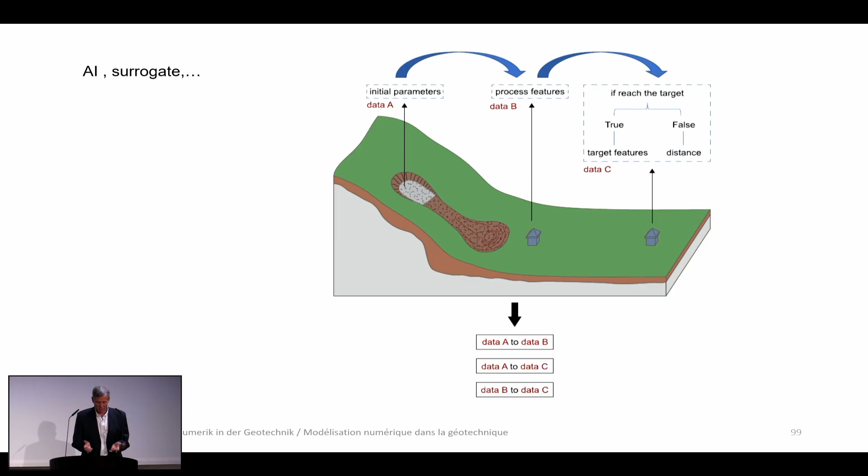So this is the main thing. Using these measurements here, you can issue a signal - blowing a horn or whatever - and having designed some escape routes, people can go far and escape. So this is a way in which we can use these things.

Well, this is an example that we're running, but I'm going to skip it. Just to finish, what is the model input in these cases? These models are very complicated, or oversimple, or whatever.

First of all, we need the topography. The better the topography model is, the better the results we will be able to provide. We need elevation and gradients, of course. We also need curvatures, because the bottom friction depends on the centrifugal acceleration, or centripetal, as you prefer.

We need physical properties: densities, porosities, rheological friction, cohesion, Bingham viscosity if you wish. We could have erosion, so you have to choose a law and choose properties. Permeability or drag forces between particles. You also have consolidation - you may just use a consolidation time, okay? And then probability - use a probability model. And of course, you have to know the initial conditions.

One nice thing about SPH in this precise context is that we have an SPH set of nodes, and we may have at the same time a very large topographical digital elevation model, which means you may have 1 million points, and then 6,000 or 10,000 SPH nodes. So you are dividing the effort a little bit.

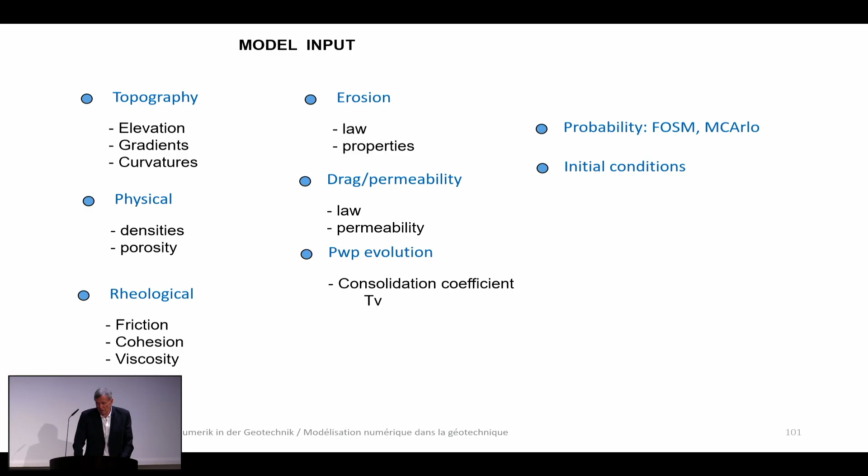Questions - you can ask directly in French if you prefer, French is okay. German, not - I'm sorry, not today, not this time still, but French without problem.